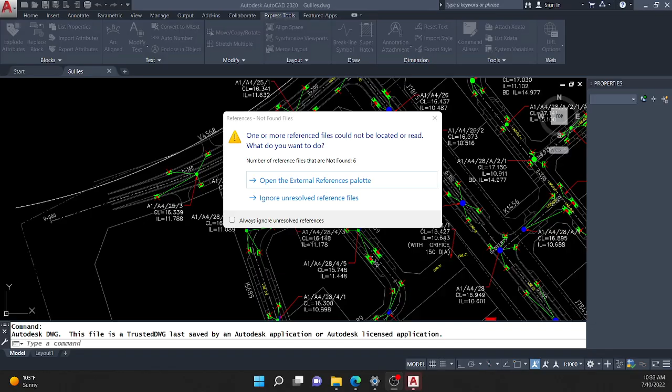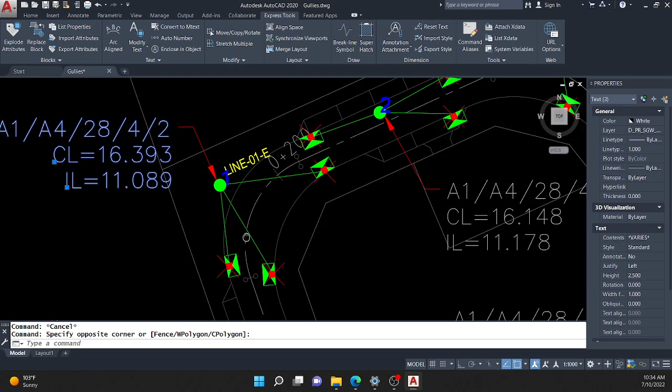As you can see on the monitor, we have road alignment here, road number, manhole name, cover level, invert level, and the trench line number. We will import this text, extract it from AutoCAD to Excel, including the exact location of this manhole, in the easiest and fastest way.

To do that, let's start with command layer. We will make a layer first, for example a text layer. Actually, we already have one, so we will just use that text layer. It's already current, it's checked, which means it's the current layer.

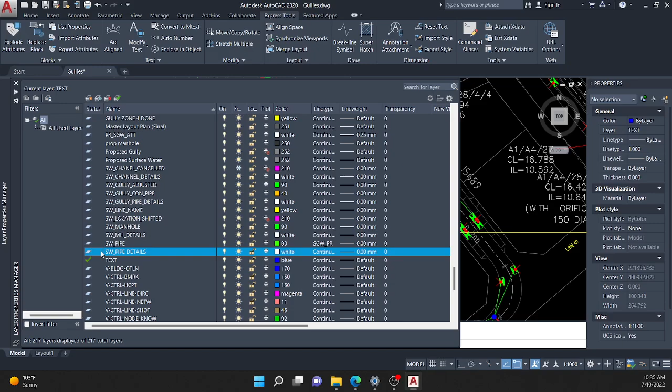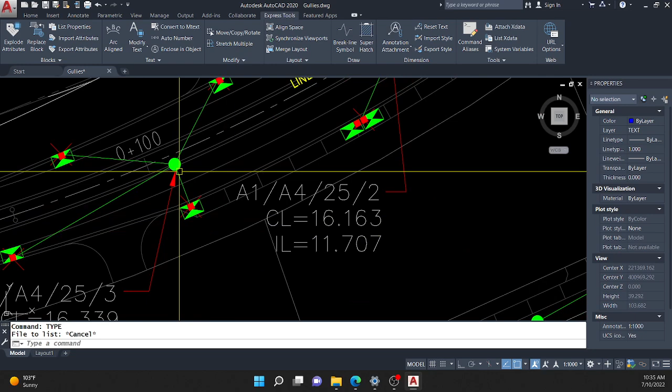Now let's type the numbering. This numbering is our guide for the sequence of clicking the manhole name - it's important. So when we make text using the text command, it's important that we type at the exact location, the center line of this manhole, because this is the coordinates.

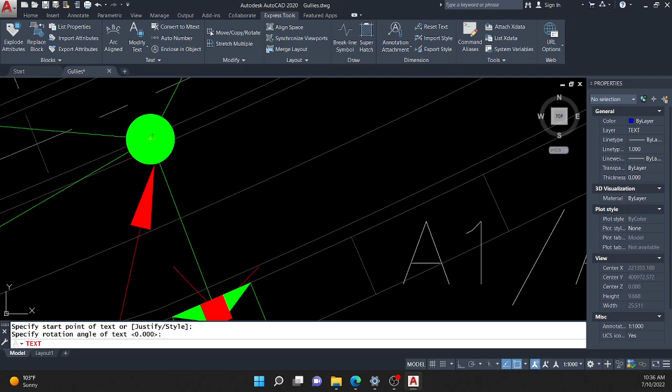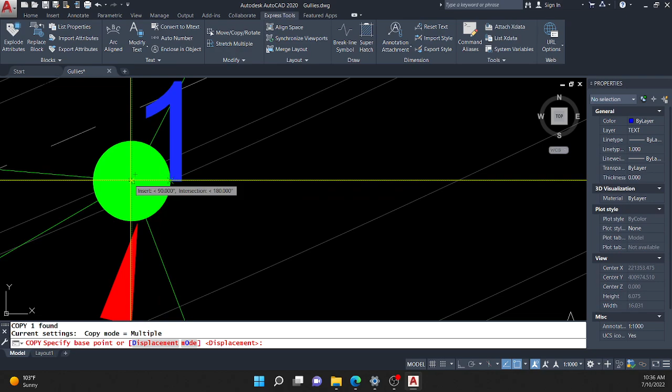So let's type the center as our base point, then enter, type 1. Now let's copy this to the other manhole. Again, it's important to click the insertion point, because this is our base point.

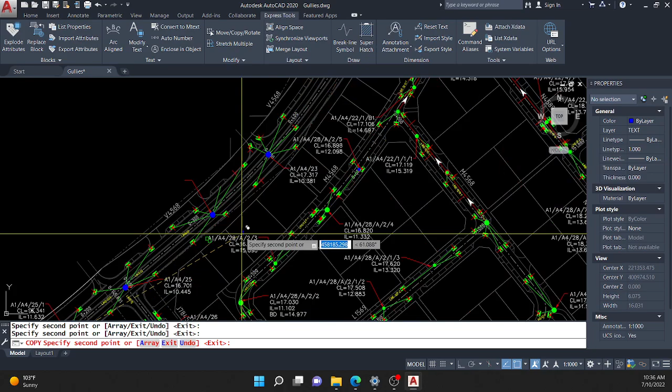Let's copy to the other manhole. Anyway, since this is just a sample, I will not make it all. I will make at least 9 manholes, just to show you the method and concept of this tutorial.

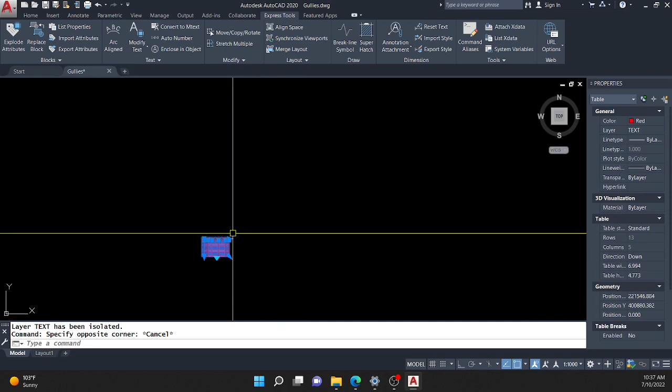And then layer ISO. Since this is all 1, now let's go to Express Tools, to the pull-down menu, Auto Numbers.

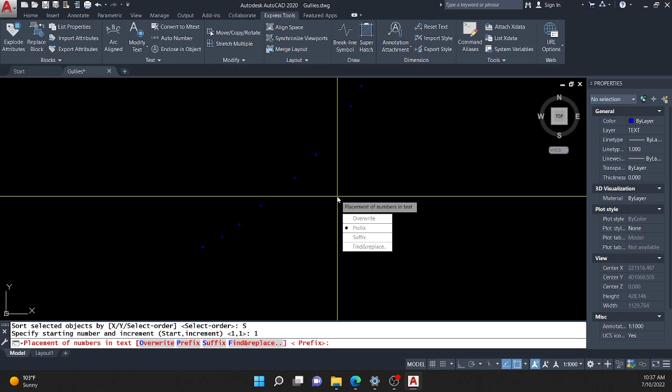Select the text that we typed, then enter. Select order - just look at the cursor on the monitor of the AutoCAD - and then type 1, enter, and then overwrite. As you can see, it will change to 6, 7, 8. It's not in sequence, but it's okay, this is guide only. Then type layon.

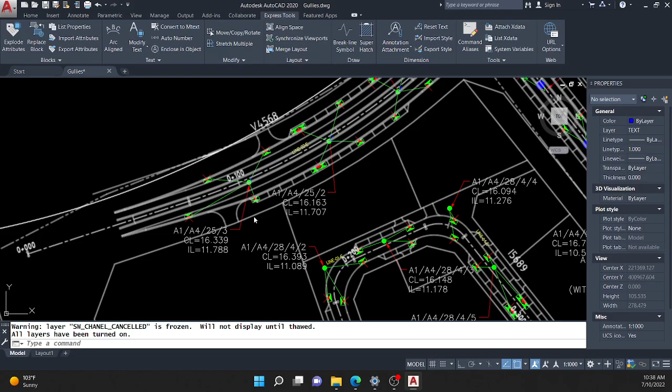Now let's go to the next step, which is I will use load application. In this step, load application, type appload. Next I will use text to column application. Just click this one, load, and then close.

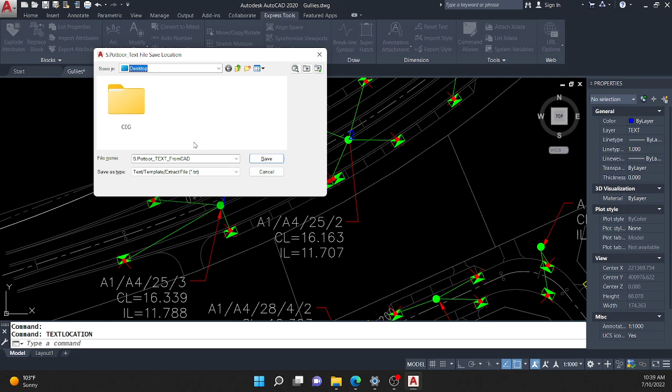Then type text location again - maybe it's not uploaded, so let's upload again the text location, load, close, and then text location. So let's put it in desktop. This is the file name, save, and the next command, text to column.

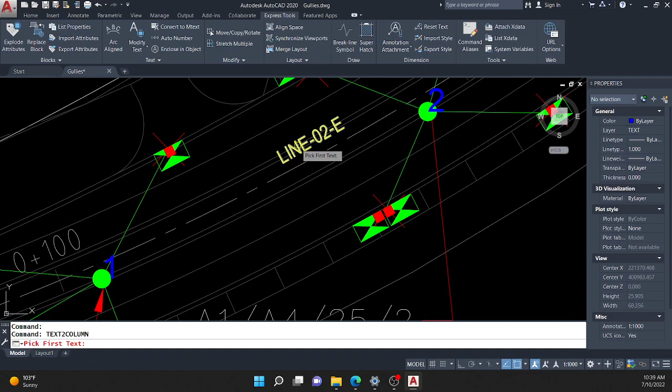Then we have to click the manhole name, cover level, invert level, and the trench line name. It's important that we are consistent with the sequence of clicking and selecting the text. For example, this one, I will pick first the manhole name, cover level, invert level, and the line trench.

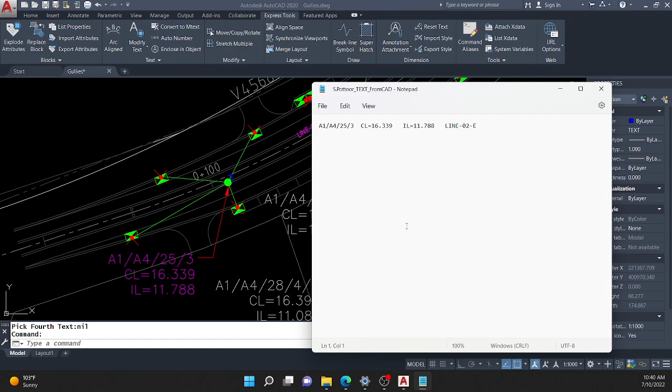I will show you the output of this one in Notepad. As you can see here: A1, A4, 253, 16.339, the cover level, and 11788, line 02, and so on. We will make that same procedure for the other manhole names.

I just showed you the sample first, and then again text to column - select the manhole name, the cover level, the invert level, and the line, and so on with the other manholes.

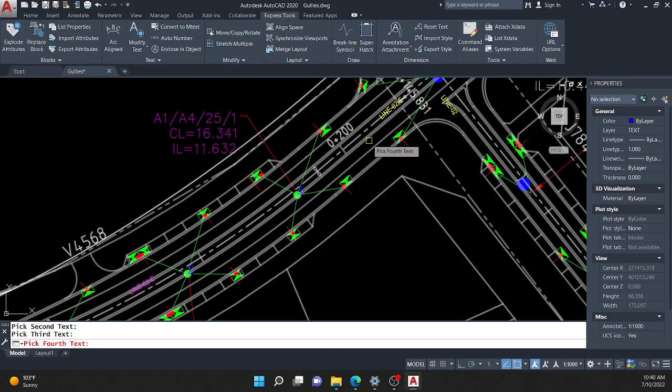So we are at number 4. As you can see here, we are at line 02E, which changed from line 02. You can see that in Excel later.

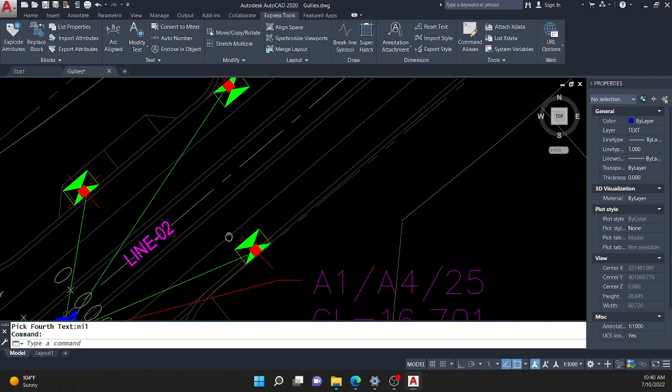I will erase this one and make it just a sample, because I erased the manhole name of this. So from number 4 again, it's important to keep the sequence of clicking the manholes.

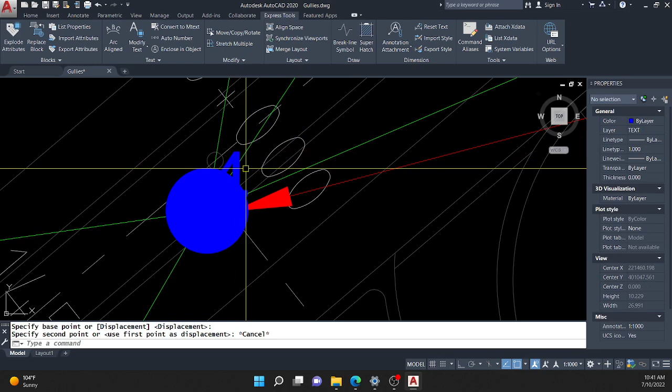Anyway, you can't move this number, because if you move it, it will move the coordinates - it will change the coordinate, and this manhole number will not be in the exact coordinates. So don't move that one.

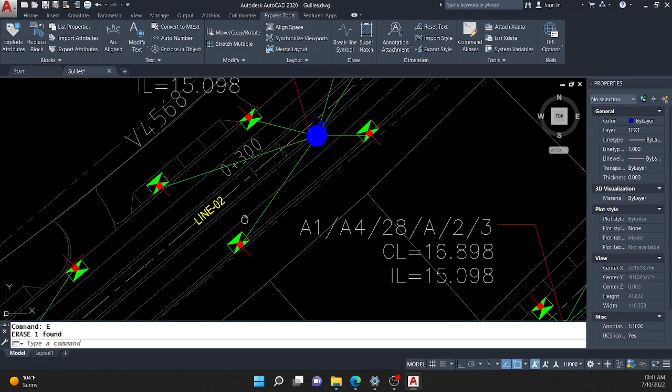And then from number 4, we will go to number 5. Text to column - select manhole name, same procedure, and line 02.

Number 6. Since this is the same line, we can click it repeatedly - it's okay, no issue with that.

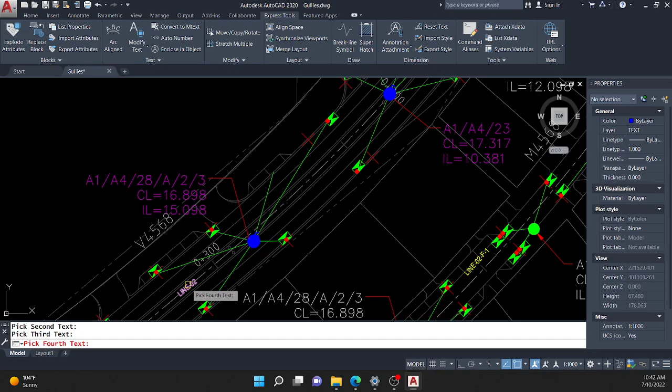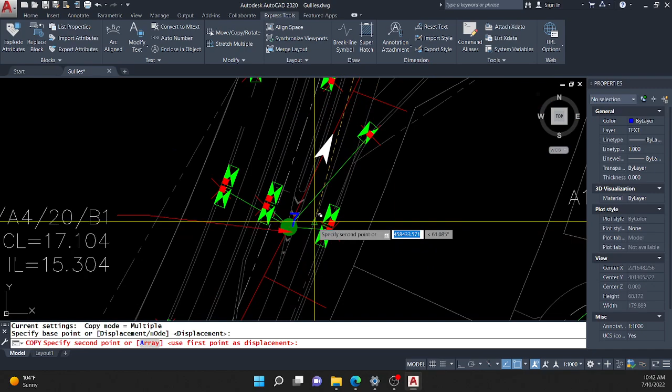Number 6. So since it's number 6 and number 9, we should go to number 7. Again, I delete the manhole name, but since this is a sample, I will just make this one a sample. Text to column.

And this is line 02 again, with number 8. And then number 9 - so I delete again.

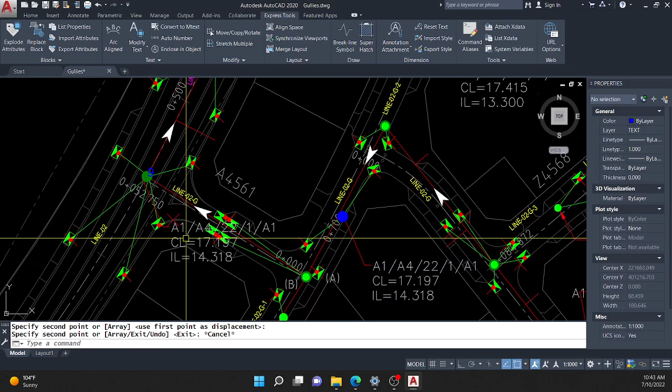Don't get confused, I accidentally deleted the manhole name, so I used another manhole name instead. This is just a sample.

After that, I will open the output from Notepad. So as you can see here, we already have the manhole name, cover level, invert level, and the branch name.

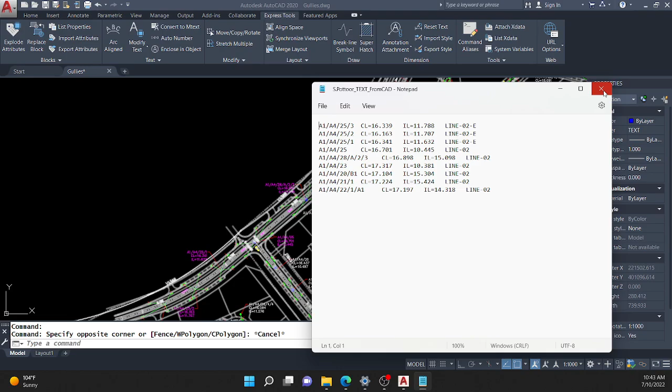Now let's go to the next step. Let's convert it first to an Excel file. I'll open one Excel file here and save it, let's name it manhole name.

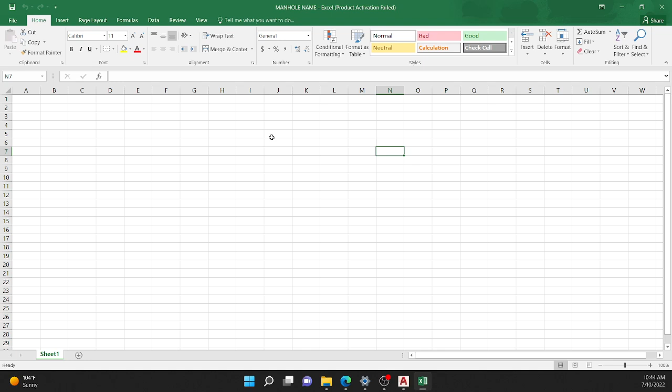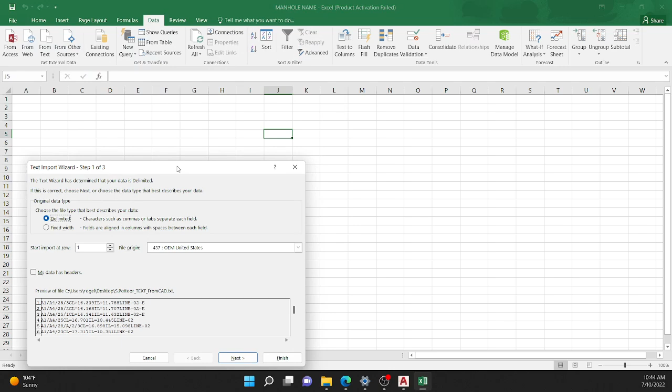To extract from Notepad to Excel, let's go to Data, From Text, and look for the Notepad file, which is this one. Select delimited, next, and then finish.

Okay, so we already have extracted the file.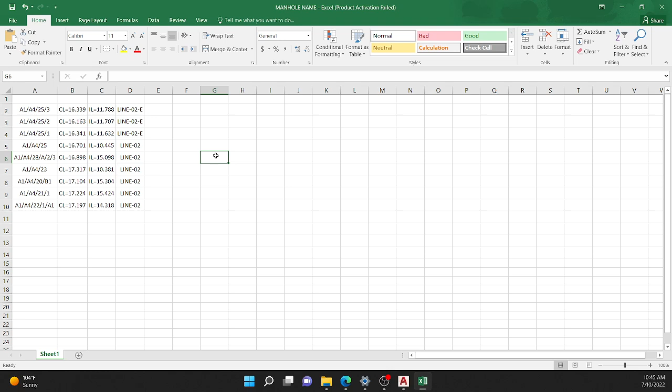Row height, we'll make it 20, centered. We don't need this CL, the cover level, so we can remove that by using Find and Replace.

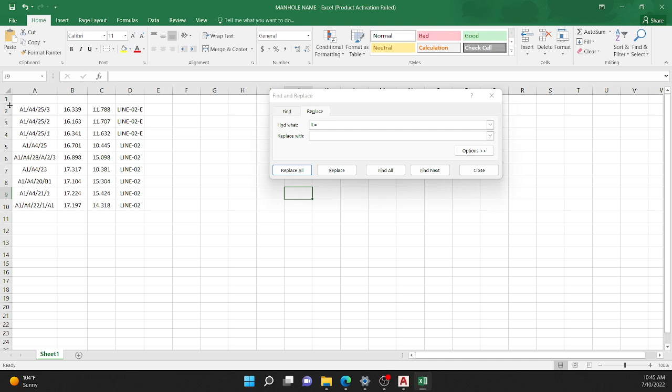Also this IL, invert level, we don't need that one. Then let's type here: manhole name, cover level, invert level, and then the trench name.

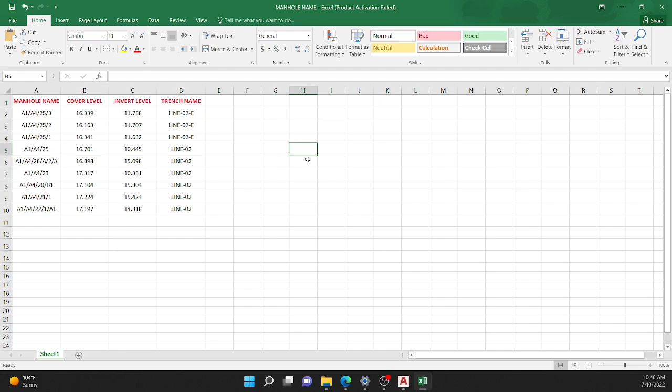And now we've converted and extracted the manhole text to Excel. Let's go to the next step,

extracting the X and Y location, the coordinates, the exact location of this manhole. To do that, let's ISO first the numbering, isolate it.

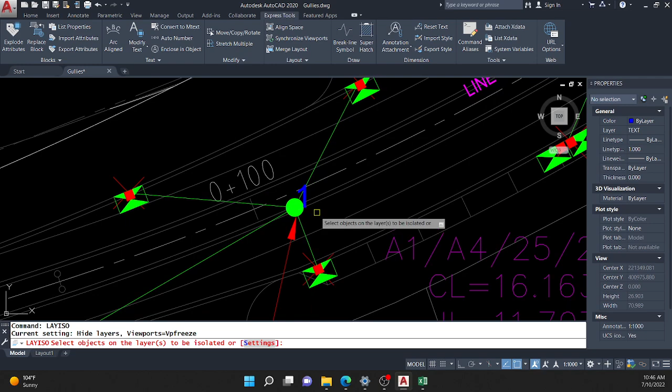It's not visible, so I will change it, I'll make it cyan. That's why, as I said before, the insertion point, the base point, is important because this is the location, the coordinates, the X and Y.

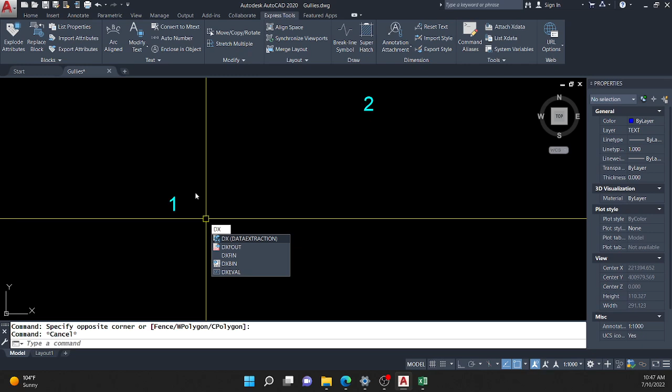So to extract the coordinate points, let's type command DX, which is Data Extraction. After that, a pop-up window will appear, then next, choose the location like desktop, and the file name, we will use for example 'one', save.

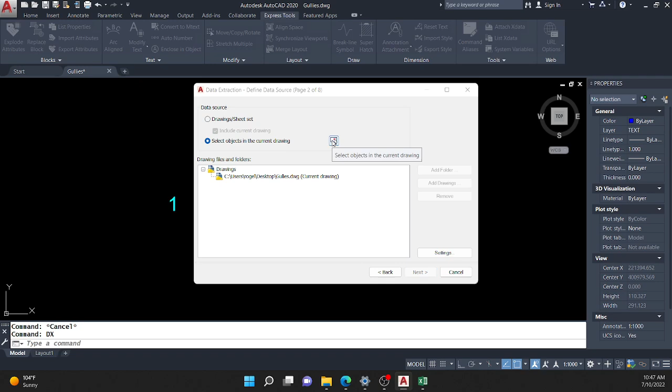Select object - we have to select the object, which is the numbering that we made. It's also important to follow the sequence, or anyway you can just click it one time, we can arrange it in Excel later.

Then next, we don't need this 3D visualization, drawing, general. We only need here, uncheck also this height, no need for that. We need only the X and Y position, no need this one also, this style - the value we need, which is the number.

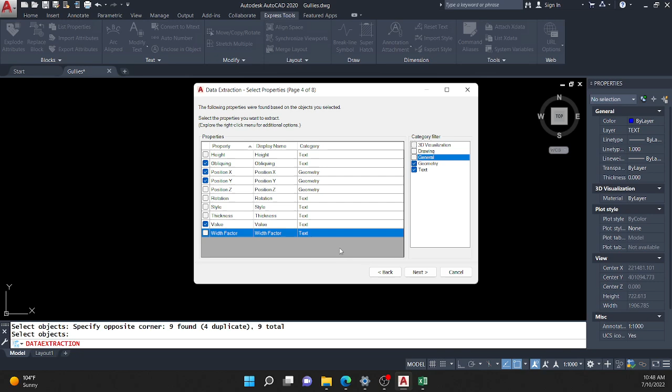Next, sort ascending already, it's okay. Next, insert extraction table.

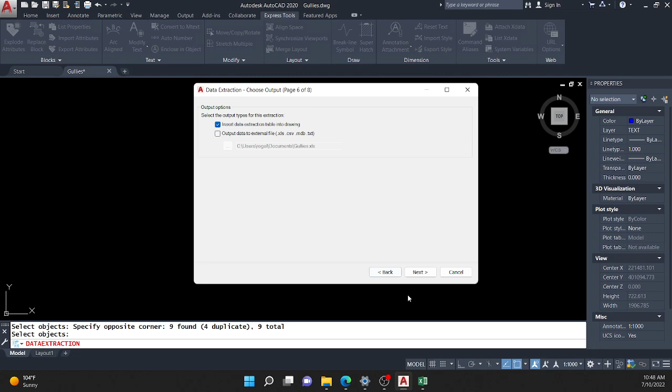We can also make it automatically into an Excel file, but I will show you the table first since this is a tutorial. So next, and then finish.

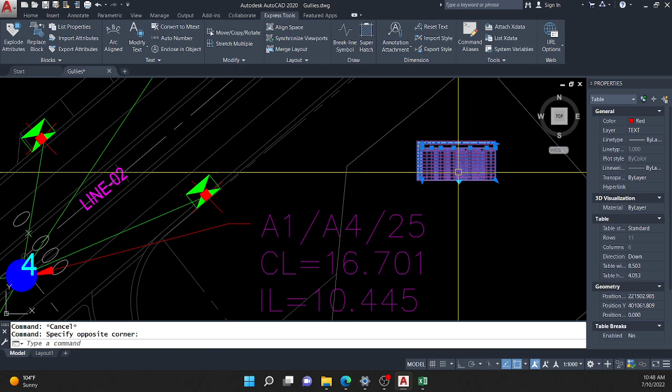I will just change the color, and now we already have the table. What we have to do is export this table to the Excel file. Just click the table, right click, export. In desktop, file name table 1, CSV file, save.

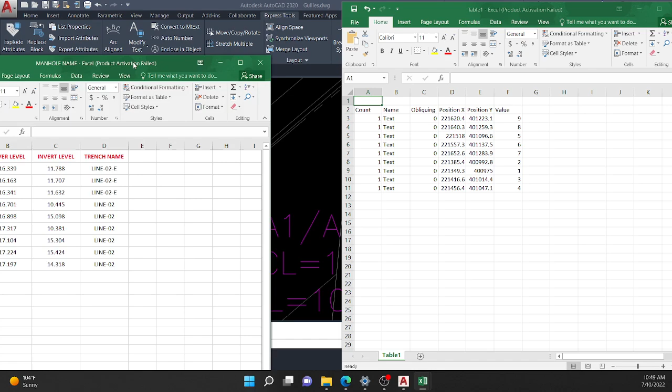Now let's open that file. It's already here, and this is the file that we made. Since we only need the X and Y position, this is the information, the data that we need in this Excel.

This is what I said before - the sequence, the numbering is not in the correct sequence. We can change it here by using Data and then Sort.

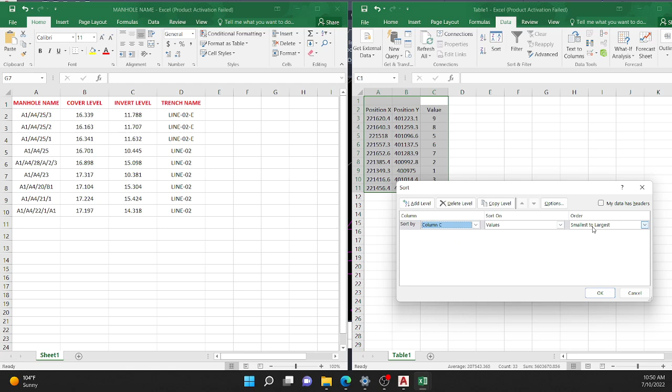But take note, if you click only this and sort this one, it will change only this column. That's why it's important that we highlight all the columns, select sort by column C, because we have to follow the sequence in column C. Values smallest to largest, and then it will automatically change.

So now we have to copy the X and Y. Like I said, this is the X location. Paste, or you can copy it all at one time. X is the eastings location, the eastings coordinates, and Y is the northings.

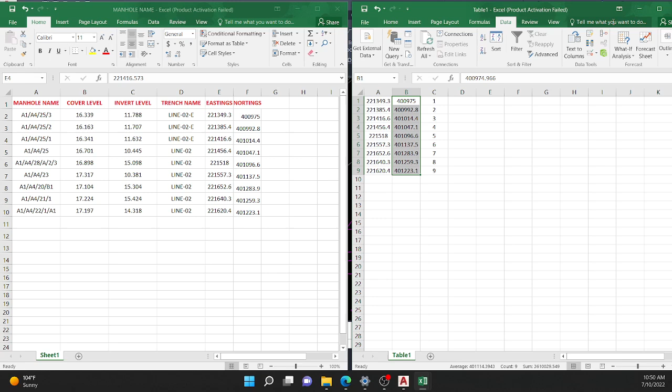And now we've extracted already the data and the text. We already have the manhole name, the cover level, the invert level, trench name, and the eastings and northings.

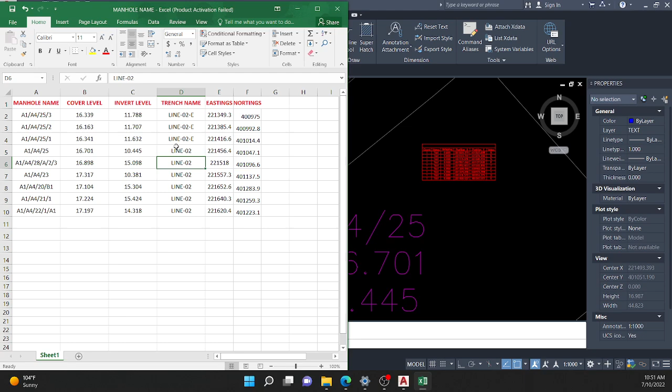This is the concept of this tutorial. Instead of copying each one by one from AutoCAD to Excel, this is the easiest and fastest way.

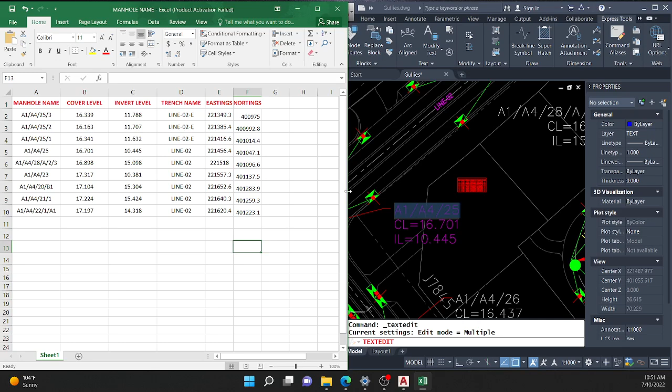And to check, we have to verify if we have the correct location. I will show you how to check that. To do that, we will make a formula in Excel.

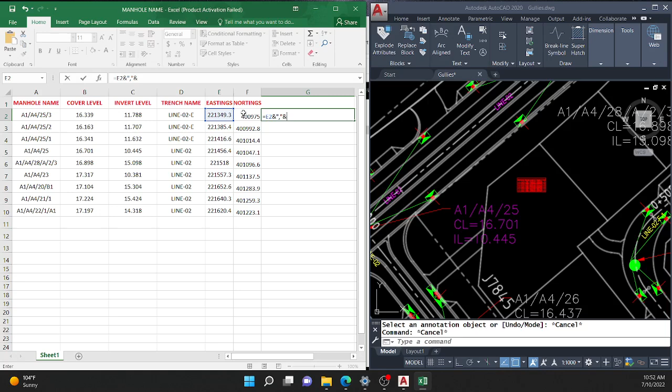Equals sign - let's click first the eastings column cell, then the and sign. Just look at the cell, then and sign, and the northings cell. Just pull it down, and now let's check it.

Just copy from Excel, and paste this into AutoCAD, command PL. See, it's in the exact location - manhole number 1, A1-A4-25 bar 3, 16.339 and 11.788 at this location.

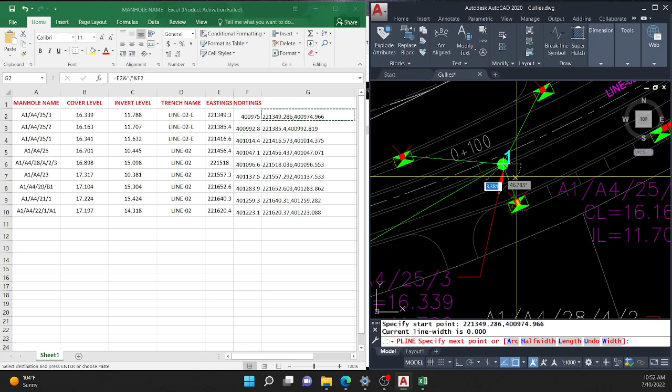Let's try this - polyline. This is manhole name A1-A4-28-A-2-3, 16.898, 15.098. Let's check this one, we'll make a random check only.

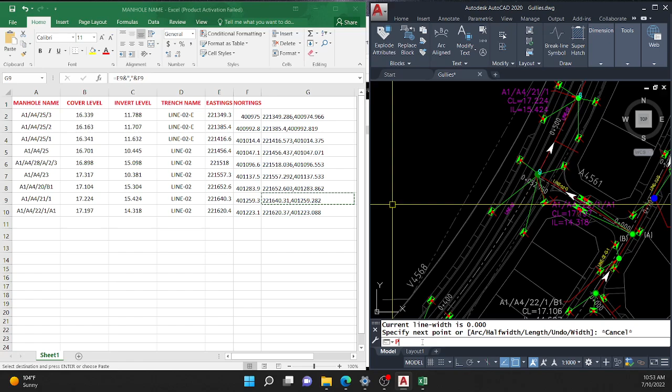This is just to show you that we are in the right track. So A1-A4-21-1, 17.224, and as you can see 17.224 and then 15.424.

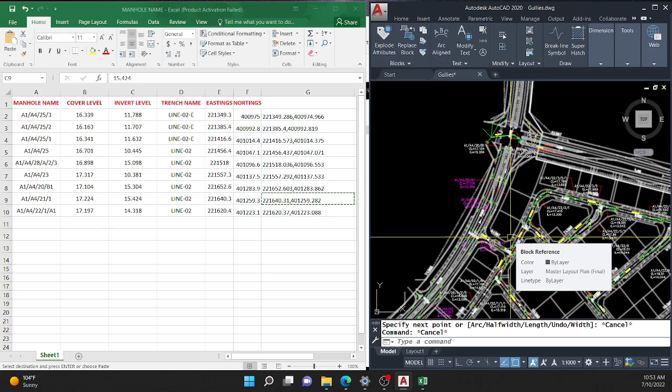So that's correct, so that's it for this tutorial. You can practice it or explore it as long as you know the concept and the method. Thank you for watching, enjoy learning, bye.